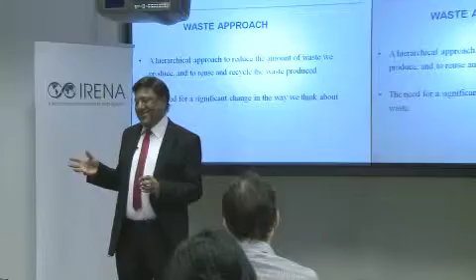When it comes to waste approach, most countries are actually working not on handling waste after it has been created, but on not creating waste in the first place. That is the starting position, and that is the thinking position.

As a consumer, you probably aren't thinking that way, which is what I see in most people. You walk into a shopping mall, and you see lots of frozen packaging, and it says 'Majana' - buy one and get one free.

Instead of making small packaging, they try to make big packaging. Everybody comes with a big car and has no problem loading it in. So you take a frozen food product with more packaging than you actually need for your consumption, because it's offered at a cheaper price. You transport it, put it in your freezer, and use enormous amounts of energy to keep it frozen for 6 months.

After that, you pick that bag up and throw it right into the trash. Actually, it would be cheaper and safer if they just bought it, went out, and threw it in the trash - end of story. They would save all the energy spent keeping it frozen in the freezer. Society would gain a lot if they did that, instead of throwing it away 6 months later.

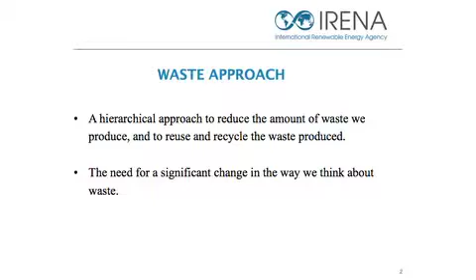So that is how it comes in - we need a significant change in the way we think about waste. It's a mental process we have to start, both among companies which manufacture and people who use it.

If we look at the waste hierarchy, and you people are working with, or hopefully going to work with, sustainable development - is that understood? Is that what you are heading for?

The first part in sustainable development is prevention. But if you absolutely need a thing, think about reduction from the beginning, and then figure out if it can be reused without having to dispose of it, and if it can be recovered on site, or does it have to go somewhere else to be recovered? Can it be used by somebody else? Can it be recovered by somebody else?

If nothing else, then off it goes to landfill. This is actually the whole sequence you would go through in life, both as professionals and as consumers, because you are both. You must remember that you are also consumers.

But you will be doing things for other people too. So if you get into a situation where you have to design something, think about the waste issue.

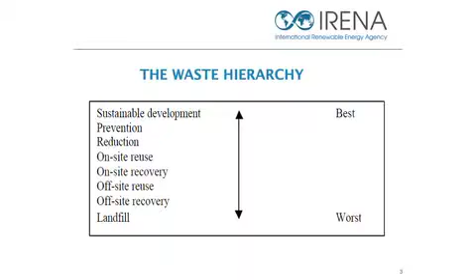So in a way, prevention is to make it easier by designing from the beginning. I'm going to start with the construction industry. The reason is that the construction industry, in our lives, is an industry which produces maximum waste out of all the industries that we know.

Normally, a person in UAE produces about 2.5 kilograms of waste, which is the average, 2.5 kilograms a day roughly they are producing. But on the other hand, this industry can produce something like 10 kilograms of waste per person when they start constructing something or when they start demolition of something. So this is a big waste producer.

Whatever you are doing, actually, if you talk to the designing people, it is how things are designed that makes it possible to recover easily or in an extremely difficult way. It makes it possible to dismantle them in an easy or in a very, very expensive way. And they could require additional waste if putting them into place requires lots of other things.

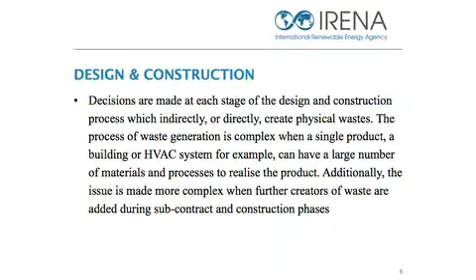Try to install an air conditioning system in a building. It's an enormous amount of piping, and there are lots of other things which you really have to bring from other people, and they bring an enormous amount of packaging with them in order to handle that. So they create their own waste streams afterwards, depending on how the initial system to be installed has been designed.

This gives you an idea how the whole system is engaged, and most parts of this system create waste. That is the other part. When you go in and work in real life, think in a holistic system way rather than just looking at a component level.

Suppose, for the sake of argument, if the cars disappeared, tomorrow there was no car. It's not just that the cars would disappear - there's enormous other activities which would disappear. All the gas stations would not be needed anymore. All the delivery trucks delivering gasoline here and there would disappear all of a sudden. Emergency services at the hospitals would disappear, who have to take care of people hit in accidents, and so on and so forth.

All the repair facilities looking for damaged cars and servicing cars would disappear, as a matter of fact. So if you keep adding up, you will see there's an enormous amount of activities which will disappear. But if you turn it around, you say, whatever I'm doing is interlinked to an enormous number of other activities and has consequences for those activities.

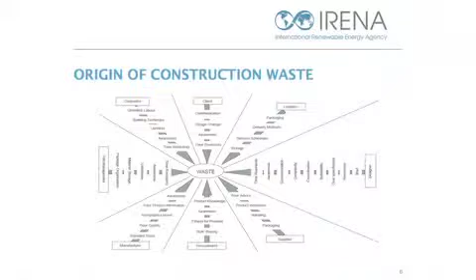To a customer, it doesn't matter how the inside looks. What matters to him is how the outside looks. Even if it's a used component, he would never know, as long as you can provide guarantees.

That is one part of the thinking: research and development should be closer to the customer rather than hidden in a basement or kept secretive. The other part is to have a systems approach, to think about how the whole system would be affected by your action, how you are interlinked.

That's actually why the word 'sustainable' has come into use—the world has realized that as far as environmental aspects are concerned, there are no national borders. You cannot say this pollution is only limited to UAE. Nothing is limited to any geographical area. It has become a global problem.

Now you've got a holistic approach—we are all interlinked. But don't keep it only at that very high level. Even in your business activities, think about how your actions interact with others' actions and how you're interlinked in the whole system. If you have any influence on the system, try to make the system rational.

Now when it comes to the waste process, it is very simple—it doesn't require an Einstein to understand. Basically, you have to identify where the problems are, investigate what you can do about it, and then do it. This can be applied to buildings, systems, installations, and so on.

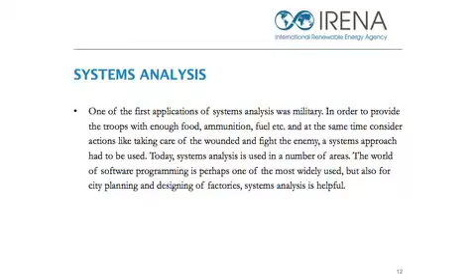They have to think all these things in a cohesive way, how things are going to move. Otherwise, you would end up like Napoleon. You ended up in Russia. You took 500,000 men, ran out of food because it was winter and there was nothing to eat. So the Grand Army perished, no matter how good a commander was on top of that. End of the story. There was no way 500,000 soldiers could survive in the Russian winter.

So have a system analysis in your mind when you are dealing with things. Now, when it comes to waste management, there are basic functional elements which we have gone through. One is generation of waste.

Can we do something about it so that we do not generate that much waste as we are generating? That's one part. The second is, if we really have to generate waste, can we reduce it? Is it possible to reduce it?

And after that, how do we collect the waste that we have generated? Can we recycle after we have collected it, or recover something? And how do we dispose it off in an environmentally friendly and nice way, as little as possible?

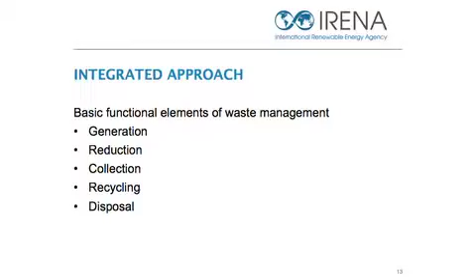The idea is that disposal should be absolutely minimum. Recycling, if possible, should be as much as possible, and generation should be as little as possible. This is minimalistic, this is minimalistic, this is maximizing. And collection is also maximum. They have to think through, exactly as a military organization has to think through the whole process.

Once again, when it comes to designing out waste, it is basically source reduction, which is much more important. Reducing it at the source is much easier than at release. Release is when the product has been released or a system has been installed. That is where reduction becomes much more expensive and much more difficult to do. It's cheapest, it's easiest if you think through it from the beginning, and right at the source you can do something about reduction.

We believe that the best management approach to waste is to manage the process so that there is no waste to manage. That, of course, is an ideal situation which is difficult to attain, but it doesn't hurt to say that we are moving in that direction. That is our hope and prayer that one should have in life, and a vision.

Since that is not totally possible in this world, the question arises: can the amount of waste being produced be minimized, if not eliminated? That question can always be asked and is answerable.

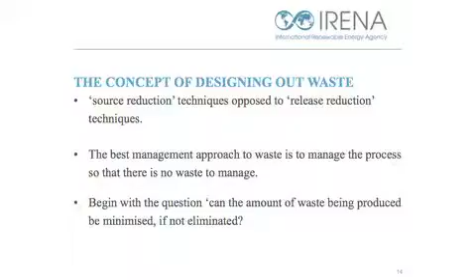Once again, I'm concentrating on design because that is absolutely the critical part. So I want you, when you go from here, if you remember anything, that would be the part you should remember. Everything else I can live with if you don't remember. But whatever you are doing, design it from the beginning in a way that it is possible for reuse and recovery, and it is off-site construction if that is possible, design for materials optimization, design for waste-efficient procurement, and design for deconstruction and flexibility.

Because if you design it in a way that the procurement also becomes material efficient, that is, if you are minimalistic in whole of it, not too expensive, not using too much material, then the procurement also becomes very simple and less material intensive. And that is what you are trying to do: in the whole of this process, you are trying to reduce the waste.

Now we get into eco-design, as they use the expression now, which is becoming very popular. Eco-design basically is product innovation which leads to less material waste. The other is to look at existing products and ask yourself: can they be redesigned so that they use less material and create less waste?

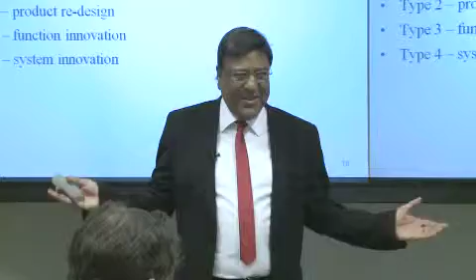That is where the systems fail. And the trouble arises because the panel manufacturer thinks, 'Oh, I have made the panel, thank you very much, goodbye.' But if we were to take one step further and ensure there was a cable coming out of it which only fitted a certain plug, life would be very simple and easier.

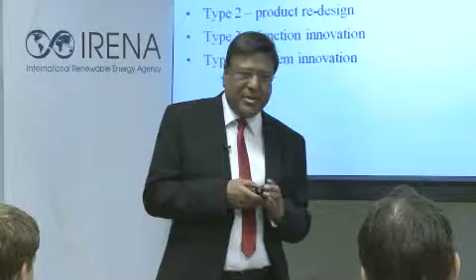So in this way, this is becoming important to think about. So the question is: can the product be redesigned in a way that it produces less waste? Can we change the function of the product we are using so that it produces less waste? That is also of interest. Can the function be affected in a way that it would have a bearing?

There are two ways. Let's say when people get older, they have difficulty in seeing. That automatically leads to higher levels of light they require. If you were to look at a 60 year old person versus a 20 year old person, which most of you are, the amount of light a 60 year old needs to perform the same task at the same speed as a 20 year old is 6 times.

That's lots of energy you need to perform the same task at the same speed. The only thing which has come in between now is age. Nothing else has changed. The question is, can you change the task itself in a way that you don't have to provide 6 times the lighting to do the task? Or shall you assume that it can't be? Of course it can be.

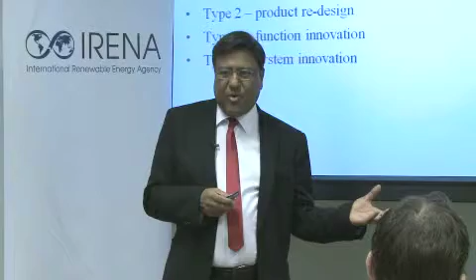But I think they should revisit once and again and ask, why are we making this thing? To do what? Can we see to it that the task itself is changed slightly so that we can make it in a more energy efficient and environmentally friendly way? So what I'm trying to say is that there's an interaction between the task for which the product is made and the product itself.

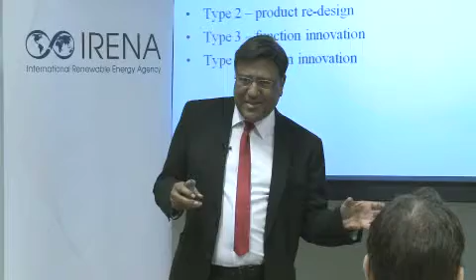Whereas we concentrate on the product or the service and not on the task. So there has to be somewhere a linkage between these two parts too, and that is important for you. If you are working with something, try to figure out what is happening with all the things that you are making, why people buy them and for what purpose. And can we do something for the purpose that they use it for so that it can be done in a slightly different way?

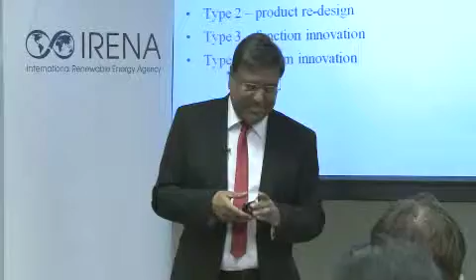I can tell you, there are many old people in Europe, and most of them, I'll tell you the functional problem, and then I will tell you how it was. It's interesting from real life. You see, when you are born, you need a diaper. And as you get older, you also need a diaper. That is, you start with a diaper and you end with a diaper. That is c'est la vie, which means that's life. You can't do much about it. So diaper to diaper.

So there are lots of old people in Europe, and they're getting older and older. Many of them are in daycare, in nursing homes, as they call them. And labor is very expensive in Europe, so with the result, they try to rationalize labor. So one of the things these people do is that in the evenings, at a certain given time, they put a new diaper on the old people automatically, whether they needed it or not, since they had to finish their task at a certain given time.

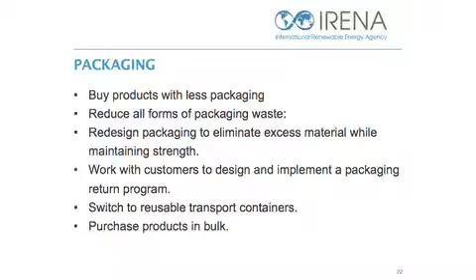So one of the projects that we are looking at very seriously to introduce in this region is to use waste heat to produce cooling through district heating networks, which means you will recover heat from power plants, from cement, steel and petrochemical industries, and feed it into a network of pipes.

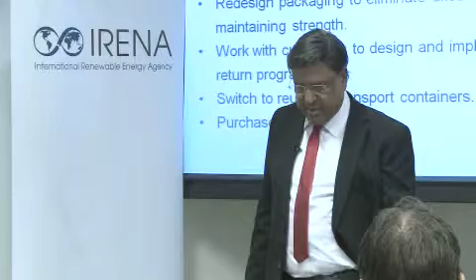There will be a pipe coming from each one of them carrying hot water, around 95 to 100 degrees, that will go close to the building, and you will be using an absorption chiller. The absorption chiller works on heat and not on electricity. So with the result, you will be able to convert heat directly into cooling, delivered at 5 to 6 degrees temperature to the building - and that is what you require, 6.5 degrees.

So instead of getting into energy efficiency, which is probably what they are working on much already - making the air conditioners a little bit more efficient and those types of things - the idea is to disconnect it completely, deliver just hot water to absorption units, and get them out of this air conditioning based on electricity.

Hot water in this region is also produced based on electricity, and all individual homes have some sort of heater installed individually. So in this case, you have hot water available now - just pump it directly into the system without having to produce it yourself.

So in that sense, we would also be working so that the hot water is directly connected to the dishwashers and directly connected to the washing machines. Now the washing machine is connected to the cold water today. If you go home and look at it, you will realize your washing machine is connected to the cold water, which means you use electrical energy to heat up the water first to the temperature you want, and then you do the washing.

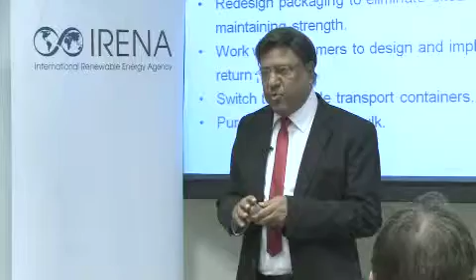In this case, the hot water will come in directly with a thermostat that will adjust it to whatever temperature you want - 40, 60, 90 degrees - and it will go into the machine directly. It will start very quickly, so your machine won't require 4 hours.

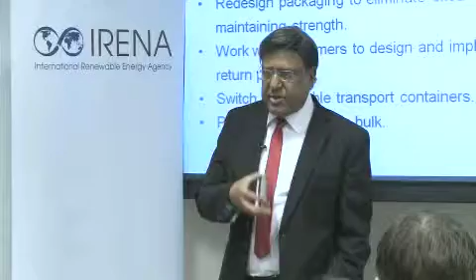This works very quickly because heating up water takes time, so that you would save immediately. The other thing is that once that hot water has been used, its temperature is only slightly lowered. It's not that it started at 60 degrees in your tap and got reduced to near zero. It's still fairly warm, something like 20, 25, 26 degrees water that you are getting on the other side.

The idea is that all that water should be taken through heat pumps. Heat pumps have a coefficient of performance about 5 times, so we'll be able to reheat it through a heat pump again. See how much we can recover out of it, and that becomes incredibly effective in this part of the world. One, the system efficacy is high on heat pumps. Two, the electricity price is very low to run the heat pump, it costs nothing practically. So you have a double bingo, you can do both things and recover energy.

The third step, which is more imaginative, is to move the region completely towards equipment and appliances that run on heat, which is absolutely possible. A refrigerator does not need to run on electricity all the time, it can run on heat through an absorption chiller. The only issue is during nights, but normally people don't open their refrigerators and freezers too much in the middle of the night. It's only during a few hours in the morning that they open it a few times, even with children around. So our feeling is that if it's well insulated and properly made, it might pull off a 10-hour shift.

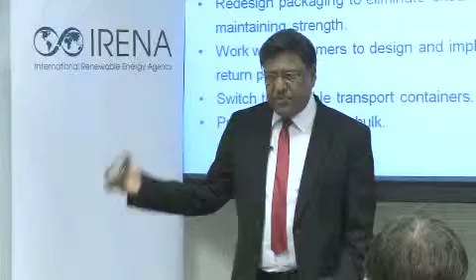The other option is not to base it on a solar system, but to keep running it on hot water, which will be available 24 hours since the industry continues to run 24 hours, so there wouldn't be a problem. We will give it a shot to shift to hot water-based appliances rather than running on electricity. And if we can pull this off, our feeling is that we will be able to reduce electricity consumption in the region by 50% in one go.

That is probably the biggest energy efficiency gain you can make, instead of dealing with individual appliances to a large extent. The reason I'm bringing this up in front of you is that when you're looking at things, try not to just look at them as they appear. See if this problem can be tackled in a different way. Don't concentrate on the equipment, concentrate on the problem.

The problem in this case is that people don't care how cooling is performed. Do you really care how a building is cooled? No, you just need cooling. It may come from anything as far as you're concerned, as long as it's comfortable. You don't want it too hot, 27 or 28 degrees, or too cold, 6 degrees. Your basic concern is that the service is provided. So ask yourself, can this service be provided in an effective, energy efficient, and cost effective way compared to what we're doing today, using less resources, creating less waste, using less materials?

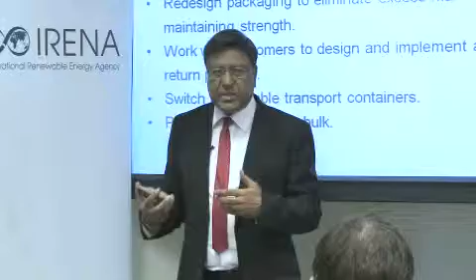From there, moving on, you can pump into it the heat from incineration facilities that process municipal solid waste. They produce about 20 million tons of municipal solid waste, and they have recycling and recovery facilities. The basic principle is you can recover about half of it, with three components.

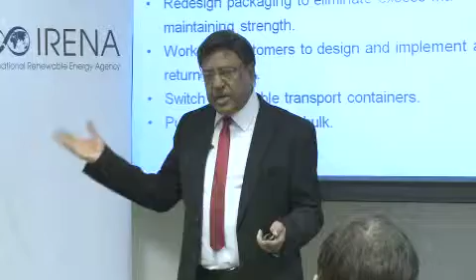One is organic waste, food, which you send to composting to make biogas out of it, a normal natural process. The other is the parts you've recovered, which you try to recycle, like bottles, cans, and packaging, which you remake into whatever you can in an easy way. The third is what you can't recycle or recover, which you now burn. That is what incineration is.

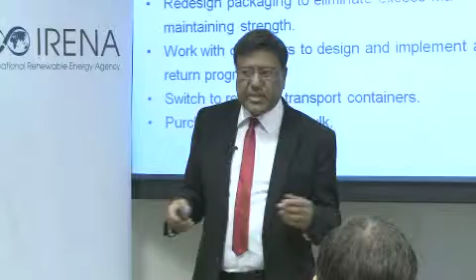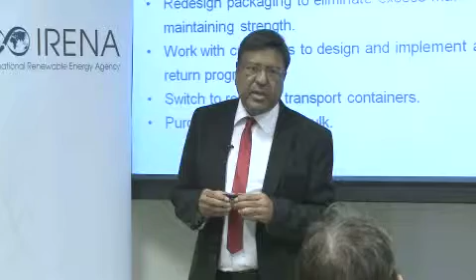That's about 48%, so 48% of 20 million is about 9.6 million tons. And 9.6 million tons can give pretty close to about 7 or 8 terawatt hours of cooling, and that is a lot.

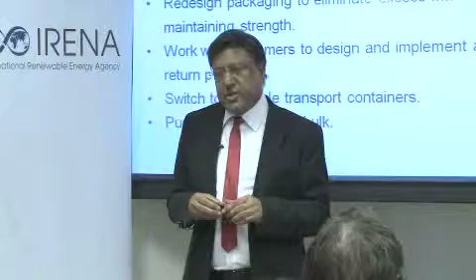The answer is that if you start distributing cold water, you need an enormous amount of it because you will be directly using it. You're not putting water into it to do something with it, you use it as it is. It will come at 6 degrees and you use it. So you have to provide it for all the buildings, which means you need at least a 3-meter diameter pipe. That's a big baby to put in the ground, and that's expensive.

And you insulate it because this is a very hot climate. So now you have a 3-meter diameter pipe and you need about half a meter of insulation on it. So you're pretty close to a 4-meter diameter pipe. Try to have curves on it and everything, and you'll be digging huge holes, and people will be totally lost in that.

Whereas if you're transporting only hot water, you'll be adding cold water into it to get into your taps at the place. So you don't have to transport that, since you're already transporting there, which can be added to it. The other thing is it will convert into cooling on the other side in sufficient quantities that you need. So if it's only hot water at 100 degrees temperature, you need just a 60 centimeter pipe. So now your piping becomes easier. That is the reason. The other benefit is collection becomes easier.

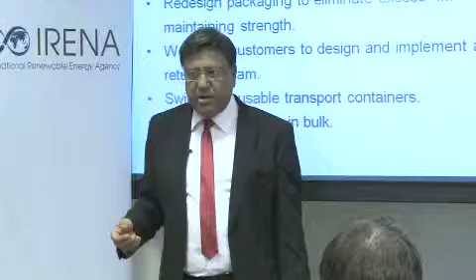If you're going to collect from industry, they don't have cold water. You go to a power plant, he doesn't have any cold water, he can't supply you cold water. He'll just say, I have excess heat, pump it into the pipe, thank you very much, and off it goes. And in the same way from a cement plant or whatever it is. So you can collect heat from all these points and bring it together and distribute it.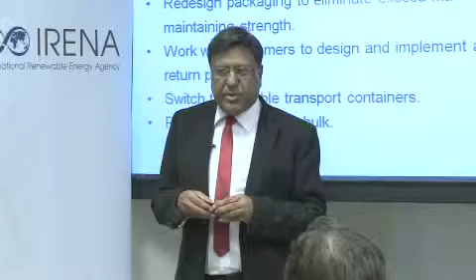The thinking is that it should be jointly owned, basically by the power plants. We believe and hope that the power plants are producing enough waste heat that it might be enough to get this going to a large extent. So they could jointly own the system in which they will feed, and whatever profit they make, they will share it. So the thinking is that the system should be collectively owned by the suppliers and the distribution company, because these suppliers would not put in the piping.

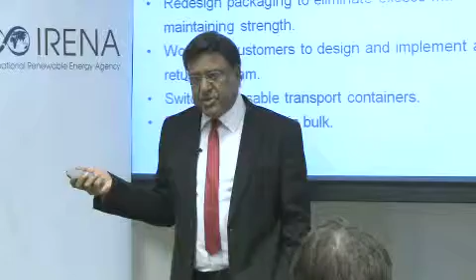Somebody has to put this big piping in the ground, so that would be done by the distribution company. But together with the distribution company, they would own the whole system and whatever profit they make.

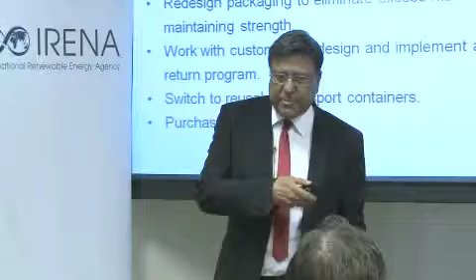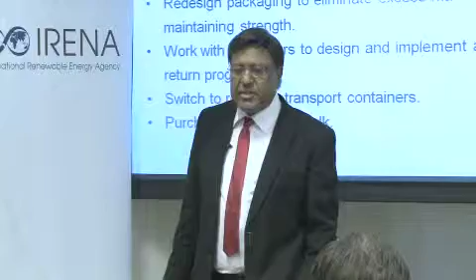And the cost calculation is as follows: electricity is only about 15 fils, but cooling at the end of the day, taking into account investments in equipment, maintenance and so on, ends up pretty close to 44 fils. So producing 1 kilowatt hour of cooling is about 44 fils, whereas the energy itself for doing it is about 15 fils. But that's just one part of it.

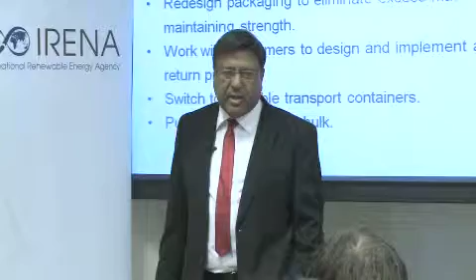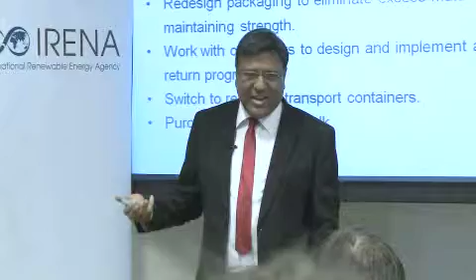So what they have to do is supply it for less than 40 fils, so they are competitive, as a matter of fact. That seems feasible because they have no price for it, heat doesn't cost them anything as yet, so whatever they get out of it is profit. It's not something they really have to commercially price, because there's no commercial price for it. It's waste, it's of no use to them.

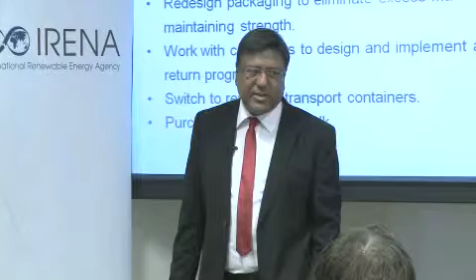So it should be extremely low. The feeling is that it could probably be sold for less than half a fils per kilowatt hour of heat, something around that. So in that sense, it becomes very, very competitive with electricity, which is fossil energy based, and would be able to provide cooling.

Now, from a sustainable perspective, when you're getting into sustainable energy, you have to remember that you will be competing with established systems in place. It's not that you come to UAE and say, we want to introduce renewable energy, and there is no energy. There is as much energy as you want, it's already being covered. So you have a system in place, and what you are doing is complementing that system one way or the other.

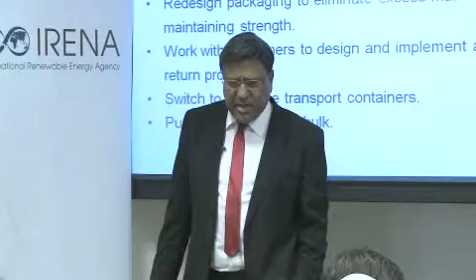So in that sense, you have to be incredibly cost competitive with the existing system which is in place, which is always not very easy. But in this case, the thinking is that if you de-link the biggest component of energy consumption in the built environment, which is air conditioning, then the energy requirement you have after that is basically for lighting.

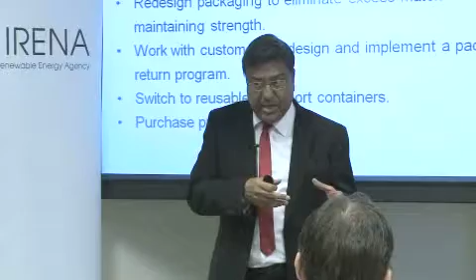Because now you have solved the air conditioning problem, you need electrical energy for lighting. Lighting you can't do with anything else. And running your TV and those types of things, that is what you would need the electric power for. That load, we think, is sufficient to start looking into alternatives at a competitive rate, because now your load is substantially reduced.

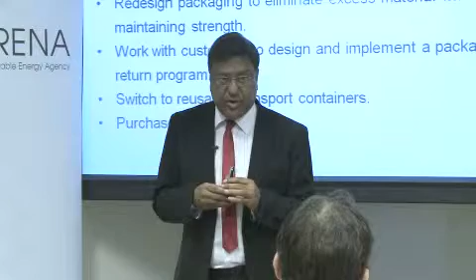But if you have too big a load, then your roof is not enough to take care of alternatives. You would need a huge amount of roof surface, which you don't have. So with a limited roof surface, you can only perform some functions which you can't do otherwise. So that is the thinking, that it may open up a possibility to get in, not 100%, but maybe pretty close. So this is what we have been thinking, and this is what I'm working on just now, to see if we can take it to a logical conclusion.

And our hope and prayer is that the utilities, the power companies, won't feel threatened in any way. They shouldn't, because they'll still be selling whatever they're selling. The difference is, if the household stopped using electricity for air conditioning, the power becomes available to create new energy intensive industry. That is a much better use of oil money than just to burn it in air conditioning units, because industry at least creates value added, it creates jobs, it creates many other opportunities which air conditioning in a house does not in the same way. So the opportunity cost you have to take into account.

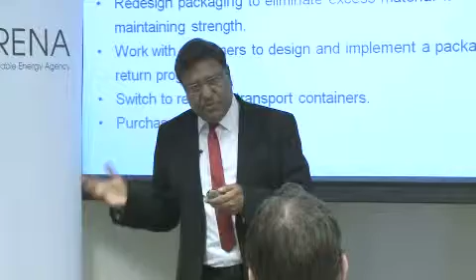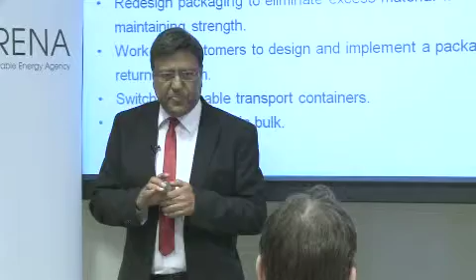Otherwise, the education has failed, if it doesn't make you a critical, analytical person. But it will also make you a troublesome person, because if you come up with innovative ideas in an established world, you rock the boat. But somebody has to, otherwise we would all be going around in skins the way we were 1500 years ago. The world would have looked the same unless somebody thought slightly differently, for the better or worse.

A newborn child in 1 year's time can produce 1 ton of waste.

So there is a last question that I have, I asked my colleagues and I will ask you too. How many banana peels does it take to drive a standard car 1 kilometer by composting them into biogas? How many do you think? Banana peels, not the whole banana - you can eat the inside, whatever is left, this yellow thing, not the white thing. How many of them, if you were to compost them into biogas to drive a standard car, not these huge Toyota Prado type things, but just a decent taxi type car, 1 kilometer, how many?

Give me a guess. 61? Huh? Kilogram? I think maybe 5 tons. Come on. 10? One, zero. Only 10. Only 10 banana peels.

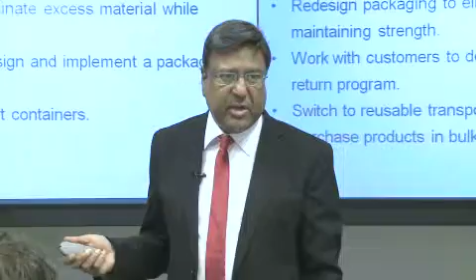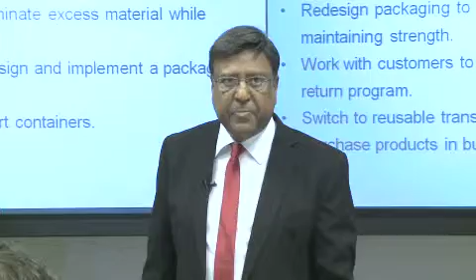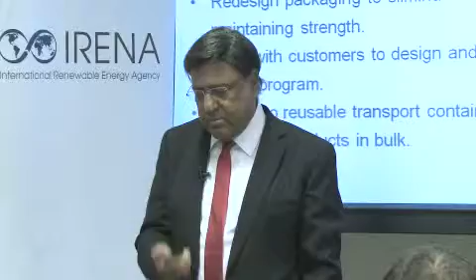One more question: if you recover an aluminum can, and you have a standard 40-inch television, that big one, how many hours can you run it if you didn't have to remake that aluminum can? Three hours. So it is.

I have a question regarding one of the things you talked about, when you design so your product can be reused easily. I'm interested from a building point of view, where your building lifetime is 50-plus years. It depends where you make it - on the American standard, you design for 50 years as a general rule.

Well, you can't do very much if you build them bad from the beginning. You are stuck, because the building is a signal that you give for 50 years. It's very difficult to alter a bad building from the beginning. The only thing you can do is let ivy grow on it - that's the kind of option left, to make it look slightly different. Otherwise it is difficult to tamper with, except for changing windows and so forth, and appliances you can change, but the frame in itself you can't do very much. You could probably insulate it, hopefully, but then the shape of the building would change substantially.

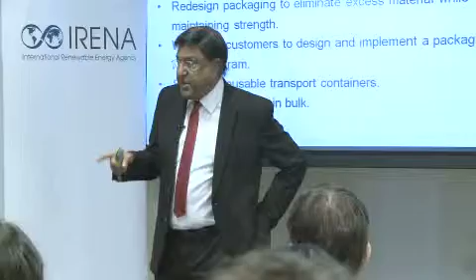And that's what I believe China should also be doing. China should be digging in the ground instead of going up and up and up. But in China, they are actually doing it in Beijing. They have started making apartments now below ground level. They don't have any access to daylight, many of them, and the rents are ridiculously low. You can get an apartment very, very cheap if you are willing to live without access to daylight, windows and so on.

Some of them have this clerestory, a little window at ground level, but the rest of the apartment is underground. So they do get some daylight, but the rents are incredibly low for those apartments. Many young people who can't afford an apartment, that is where you have to start somewhere, and they get an apartment there and they start there.

So it is happening in China, but this is actually the place where they can have shopping malls and so on. And the reason why it can be done now, and it couldn't be done before to a very large extent, is that soon you will have organic light emitting diodes.

The capability of organic light emitting diodes, you are using them in iPhones today in case you want to know, that is OLED in iPhones, is that once you take them down, they will be as thin as paper. The whole lighting would not be like these huge things, they will be extremely thin. And the other is you will be able to make them in big sheets. So once you stick them up, they will give a feeling of a skylight.